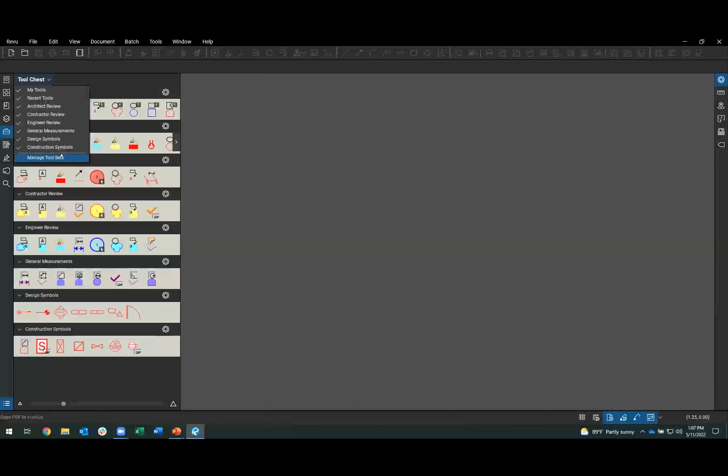Inside the Manage Tool Sets dialog box, you can click Add in the lower right corner. It will ask you for a title, and this title is what shows up and displays on the upper bar for that tool set. So what's the name of that tool set? What do you want to call it? Versus just giving it a generic name like Tool Set 1, 2, 3, give it some meaning and context to the types of tools you want stored within it.

Versus just being called Bob's tool chest, think about what's in it. Is it measuring tools? Is it common stamp-style content or symbols you might reference? Is it for wiring, plumbing, ductwork, or whatever else? Give it some actual meaning. So if I go through and do, I don't know, how about measurement tools?

So in there, I want to put tools tied to things I want to measure. I want lengths, areas, counts, whatever it might be to leverage within that tool set.

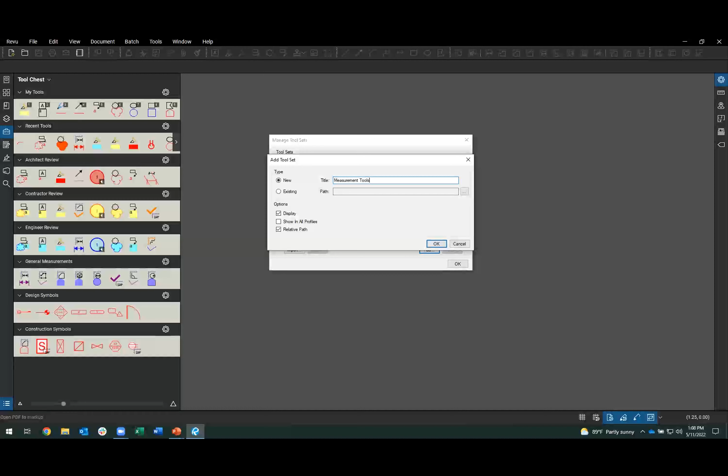It's going to prompt you for a place to save it. It should default to where the rest of your tool chest sets are located, but you don't have to store it here. This is just where it defaults to.

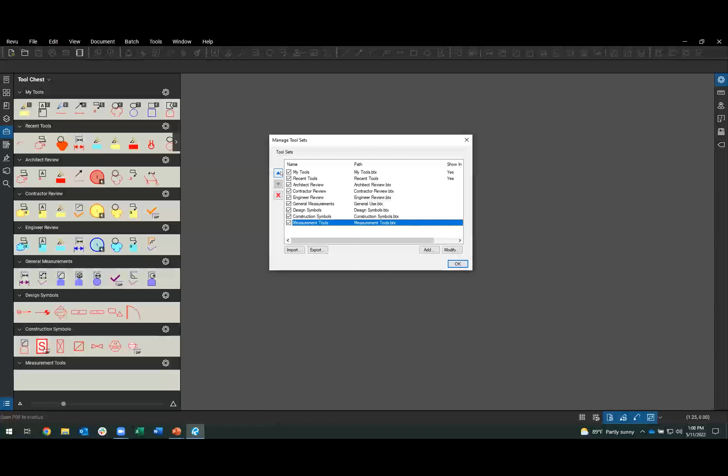Now it shows up here at the bottom. If you want to reorder that, you can simply move it up the list using the blue arrows on the left-hand side. I can move this up or down and see that tool set I just made moving up inside the panel. Also from here, if there are ones you're never going to use, you can uncheck them so they're not displayed and don't distract you from the right tools you want to leverage.

And you can select them and choose the red X here to just remove them from your profile. It won't delete that tool set from where it's been stored, like your drive. It'll delete that tool set from within the current profile you're trying to access and leverage.

That's maybe one piece to point out when it comes to sharing: the way you organize and create these tool sets can be tied into your profile. So you may want to go through and create your own department or company profile first, then flesh out the interface and the tool chest as part of that process.

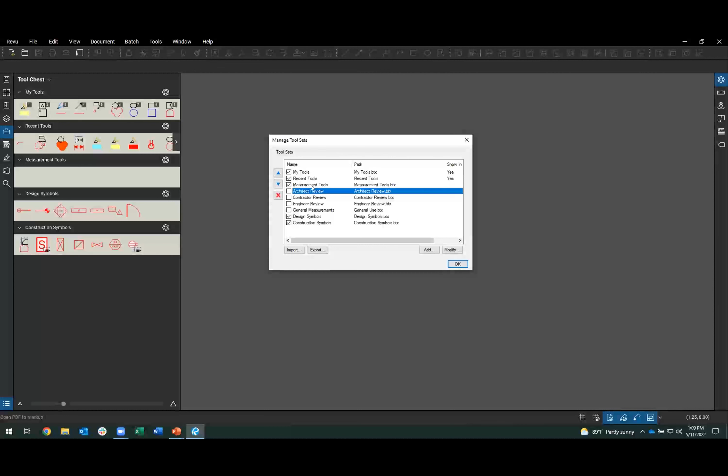So I've got my measurement tools towards the top. Now, how do you add some content into it? I'm going to grab just a file—this could be any random file you want to reference, even a blank sheet. It depends on what you're trying to create and how you want to leverage that into your tool chest set.

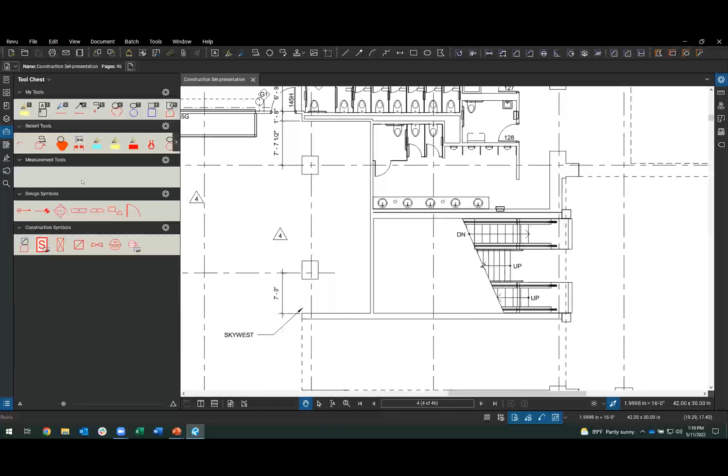In this case, I want various measurement tools—different ways to get lengths, areas, quantities, volumes, whatever I might need for the measurement process. The general premise for leveraging this is to use the tool on your PDF and then customize it to have the right properties it needs.

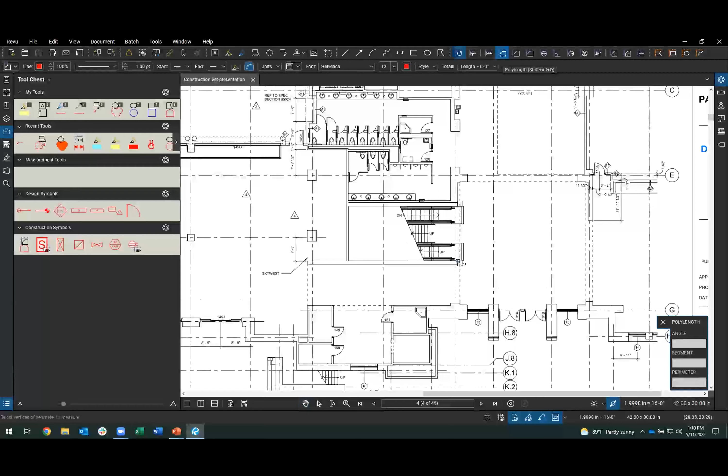So I'm going to grab my poly length measurement tool and use it somewhere on the PDF itself. That's good enough for what I want to have. Now, what about this do you want to change? Do you like the color? Great, if not, change it. Do you want the values being displayed, yes or no? Do you want to change the line type being used?

Maybe this is for a specific use case—I want to trace out the gas line being brought into some facility. It's coming from the street, going through some route, and I want that overall gas line distance for whatever it's going to be used for. So I'm going to change the line type, the style being used, to include what it's measuring. I'm measuring a gas line, so I'll have it just state the word 'gas' inside that line type.

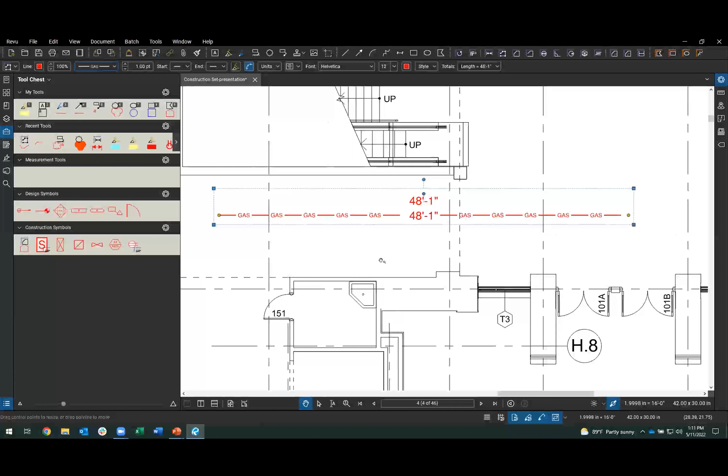Other options here too, like I mentioned, is color. Do I want that to be red, blue, green? What do you want to have that take on for the actual property set? Maybe the gas line, I'll have this be this

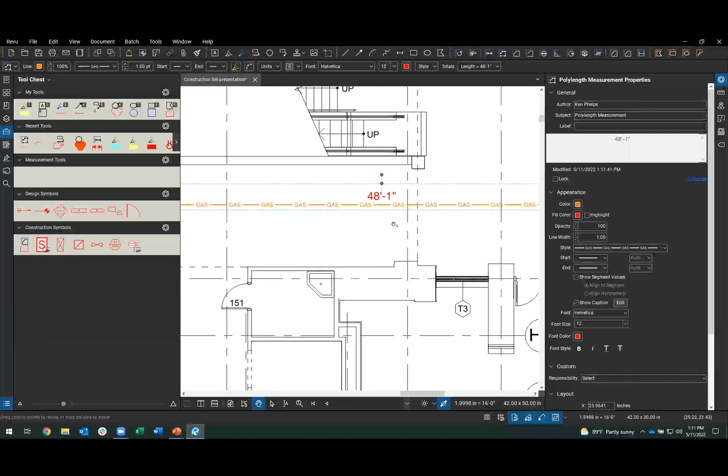orangish kind of color being used here. Just go down the list for the options that you have for that item. In this case, for a measurement tool, I'm not worried about the segment value, but it makes steps up and down, right, left, whatever. I don't need all the individual legs to be displayed on there. I may not even want to have the overall. All I want to have is just to draw out where the gas line goes. It's still going to track the value. Just because it's not displayed on the sheet doesn't mean it's not still tracked down here.

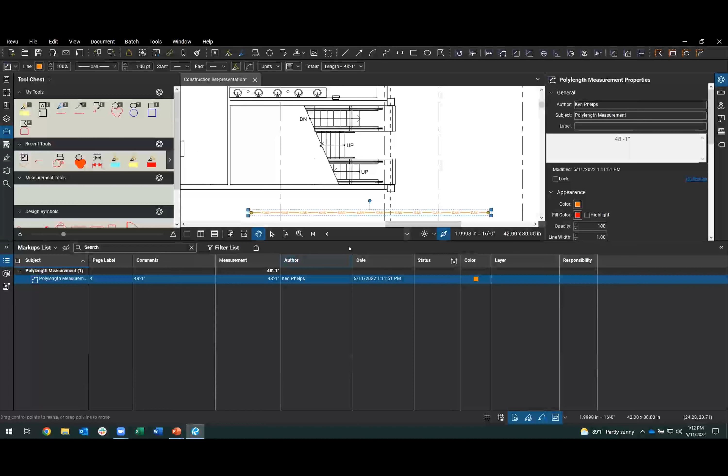So my measurement is still here. So if I use the gas line in 18 different places on the PDF, the overall total will still be here down below. And as you leverage it, it's still going to add it up.

Now, one of the big things that you make sure that you change is the subject. What is this measurement of? There's a number of ways to go through and handle and manage this, but what I typically would have you try to do initially is to be very specific with the subject. This is gas line. Is it 1 inch, 2 inch, 3/4 inch, whatever it is you're trying to measure, give it some details as to the exact properties of what that's supposed to be for.

I'm going to just call this, I can't spell, gas line. That's all I need. I got the right color, the right line type being used, all the right properties that I want to have assigned to it.

I can then add this now into my tool set. There's a few ways to go about doing that. At the bottom of your properties panel, you've got add to tool chest here. Then you just choose which tool set that new feature should be a member of. You can also simply right mouse click on top of the markup you have. You've got add to tool chest. Same idea, you choose which tool set that this new item should be a member of.

Now, if you do have your properties toolbar turned on, that's mine here towards the very top, this secondary row of icons that I have. On the beginning side of that, we've also got add to tool chest from here. There's at least 3 ways through some buttons and menus. You can also, if you have your recent tools enabled and that tool chest set is turned on, it's right here. It's the last thing that you use in that list.

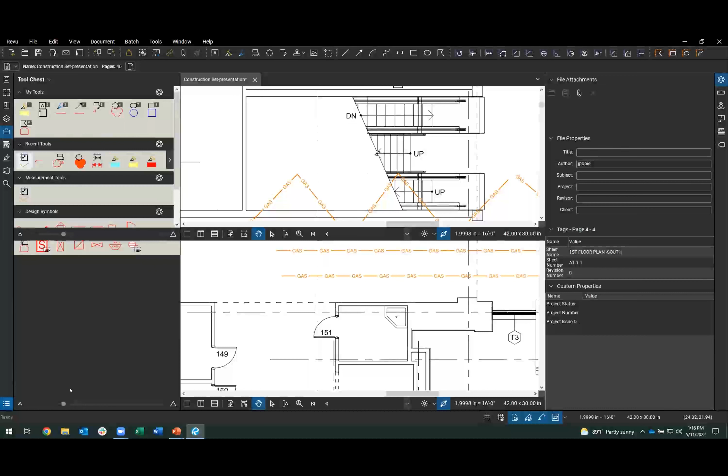So now with that tool added, I can leverage this any which way I want. It's going to add in that same line style I chose, the right colors I had assigned to it. Then again, down below, it's going to tally up all those lengths I have added into the PDF. So I have my gas line, I have an overall 178 plus feet of gas line needed for this one.

So that's just one of the ways to go through and add content to the PDF. Use the tool, and then customize that tool, add it to your tool chest set. It's all that that process really entails. It's just that same routine over and over again for the various ones that you want to make.

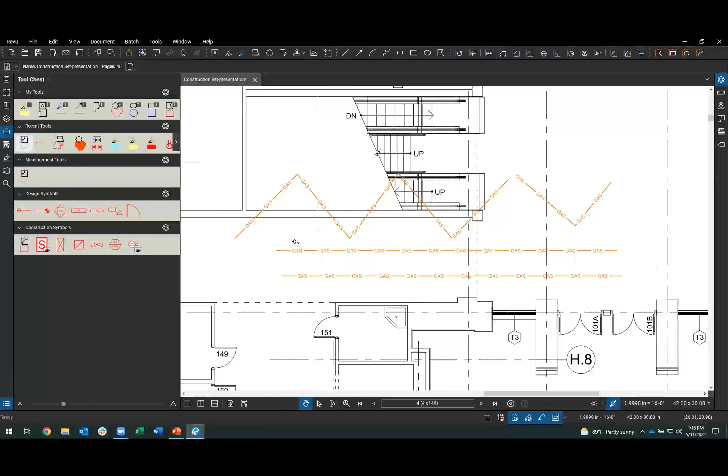So I'll go through it just one more time real quick, but maybe this one I'll use for an area. So an area measurement placed somewhere here on the PDF. And where I'm choosing for this is kind of secondary, the volume, the range, the scope of that doesn't really matter too much. I'm just building out the base tool first.

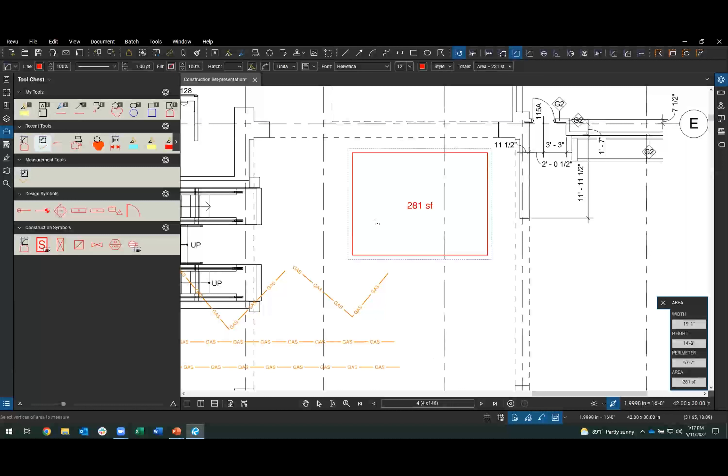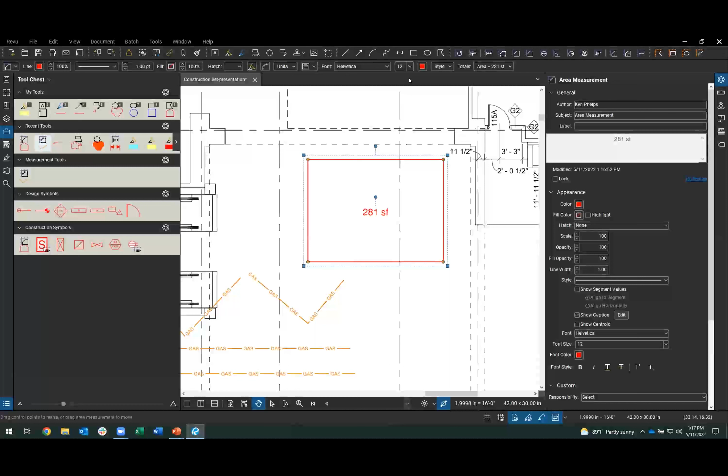Now again, properties. What type of area measurement am I trying to look for? Is it going to be here's the square footage of tile that I want to have, or here's the area of concrete being poured, something along those lines. All of that content is becoming part of that subject that you want to have. In this case, that area is going to be, I'll just say it's carpet for lack of a better example.

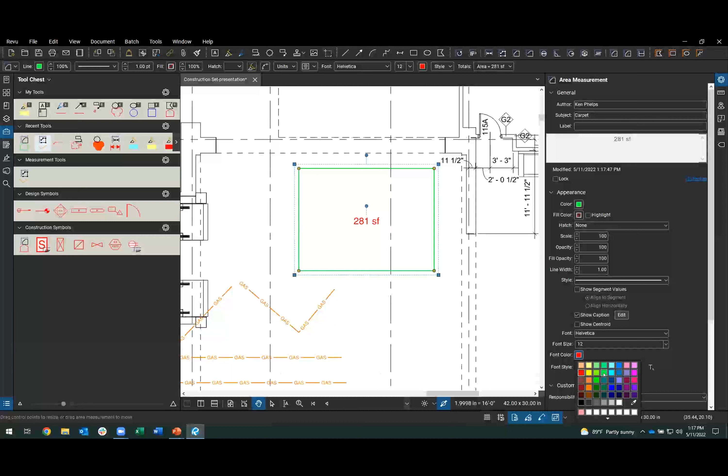Same thing, change the properties. What do you want to have for this? It's going to be green, blue, orange, pink, make it match the way you want to have this particular tool look. Maybe this one's going to be more of a cyan like green shade here. Fine, and this I will have the color turned on for, or the text for the value inside of it. You might even have a fill.

I've got a highlight type so I can see behind it. Of course, green on green, not ideal, so I'll change my fill opacity, just has a little tint of a shade to it so it kind of stands out a little bit. That's good enough for me for how I want to leverage the carpet tool for square footage.

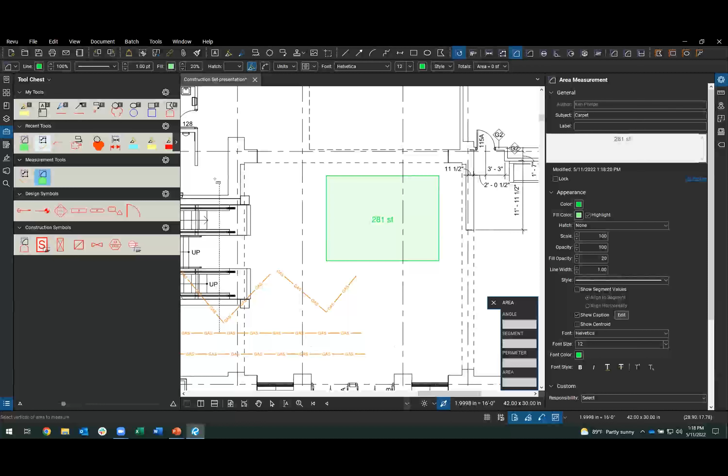So again, define all the properties to it, and then save it into your tool chest. Once it's over here, if you did it with my method I just showed, with the right click, add to tool chest, just double click the icon. So it has then the properties mode versus the drawing mode.

Now, as you flesh this out, you might have 19 versions of things using the poly length tool. It can be hard to discern one from another in this icon style display, the symbols being used here. You can change this display to what's called a detail mode. So on this little gear icon on the corner of that tool chest set, go to detail, and now it shows the subject next to the icon for it.

So if you have the condition where you have gas line, there's 5 versions of that. Now there's sizes A, B, and C being used for that. You can have a better clarity understanding which one you're selecting versus trying to guess, thinking the blue one's the 3/4 inch and the red one's the 1 inch. Just change that display.

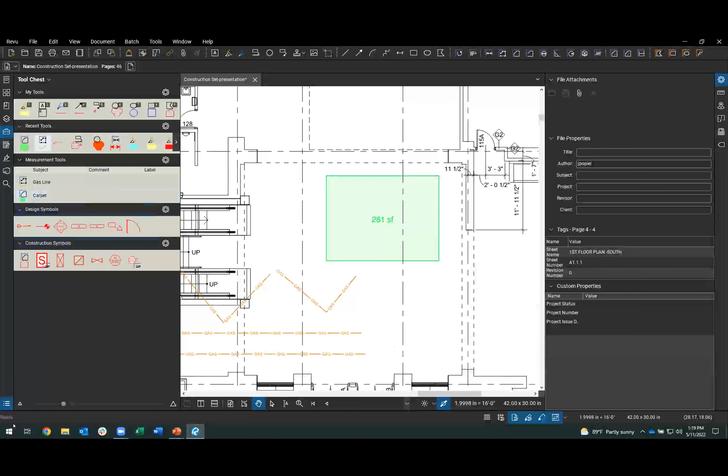Also, by giving it a subject down below here, this is what helps you go through and collect all the values and sort and filter and have the content displayed to organize the information more appropriately. So now if I add in, say, my area tool I just grabbed, areas here and area there, it groups these together down below so I can get the totaling done right for me for each one of those measurements because I'm sorting by the subject.

I know exactly how much carpet versus hardwood flooring versus tiling. If I have those tools set up for area measurements, it'll collect those and group those based on subject, based on what you're sorting off of.

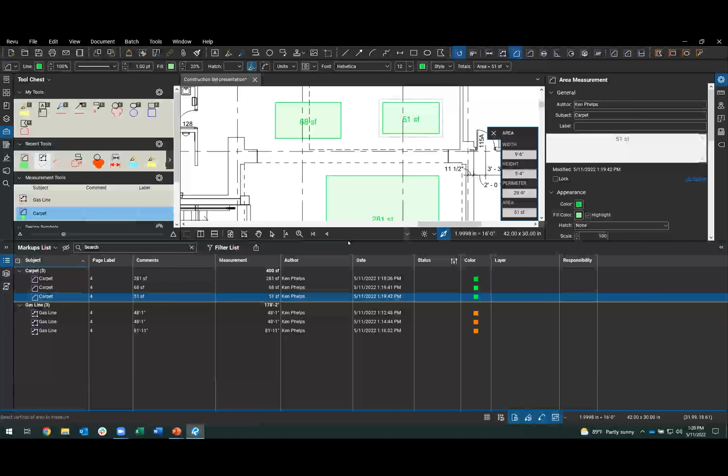Another way to go through and create content and add information into your tool chest: it might be for a symbol, like my door here, or the little valve down here. Just draw it up.

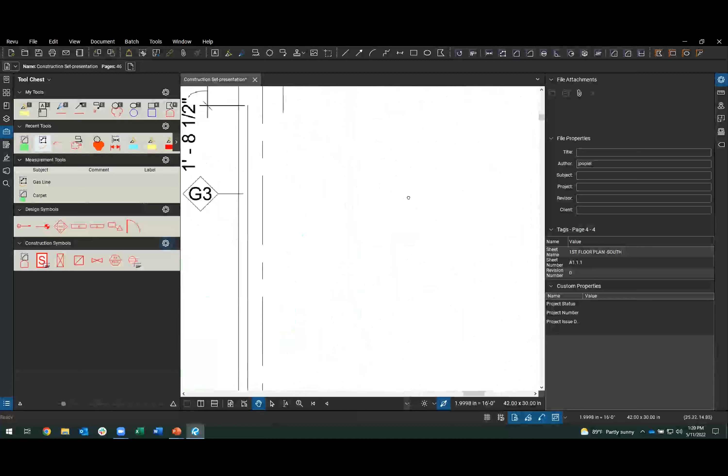If I want to simply draw in some new shape to be used here, it can be leveraged for whatever makes the most sense. I go and just grab a rectangle, whatever size it has to be, and draw a line coming across here. So in my example, I have 3 different objects that make up this symbol.

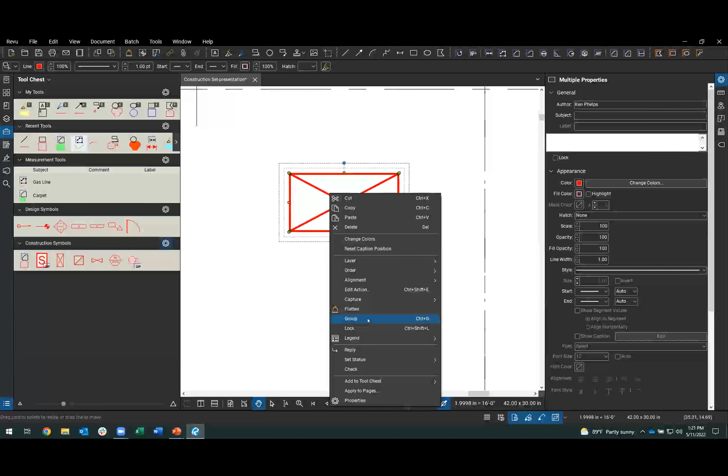If I were to take this symbol as it is and add it into my tool chest, I'd have 3 separate items, one for each line and one for the rectangle. If I want just 1 symbol, I need to make this 1 symbol first by simply grouping that together. Now, with it grouped, it's 1 item versus 3 separate items that make it up.

Same approach - you still want to go through and adjust your properties, change the subject. When you group, make sure you change the subject after you've grouped it. Otherwise, you'll have the subject be the name of the tool that made it - in this case, the grouping function, which made this kind of envelope-looking symbol that's here. Make sure you change your subject.

I've been bitten before where I've changed the subject on the rectangle to call out some kind of valve or wall stud or whatever it's going to be leveraged for. Then I group it and I lose that, because the grouping name doesn't take on the properties of what's beneath it. So make sure you change the group.

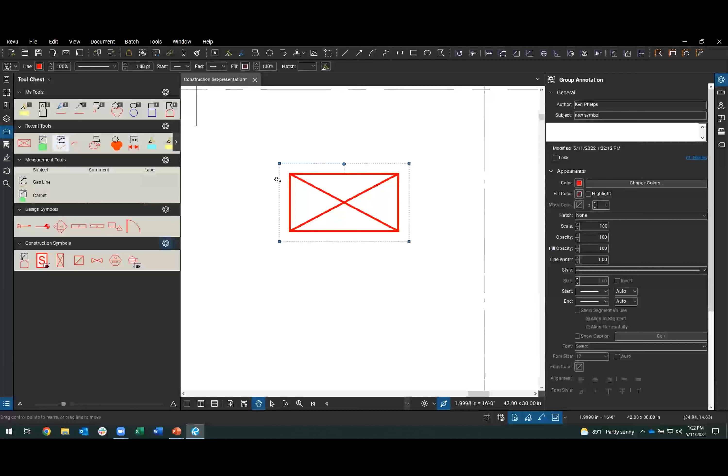Call this a really fancy name, 'new symbol,' whatever makes the most sense for what you want to call it. Same thing - however you want to add this into the tool chest, you can take it and drag and drop it right here from the recent tools, or like I'd shown before, add it from your tool chest this way.

Now that symbol can be added into any PDF I want to leverage in the future.

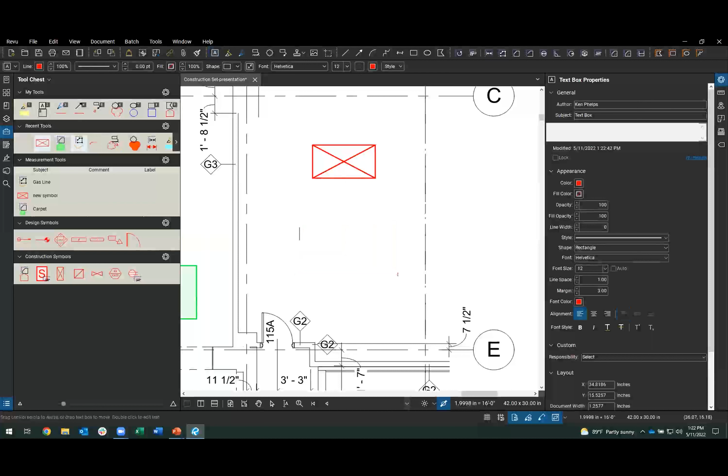Now it can be just basic text - I want to have a basic text note. Maybe you've typed out some long paragraph on why a certain inspection failed, or some code requirement for the conditions to be successful in building this project. Whatever that notation has to be, you can type it once and save that into your tool chest.

So next time that same condition comes up where you're reviewing a set of plans and go, 'well, that failed because of this again,' you can take that note and simply place it where it belongs on the PDF. I don't have to retype this ever again.

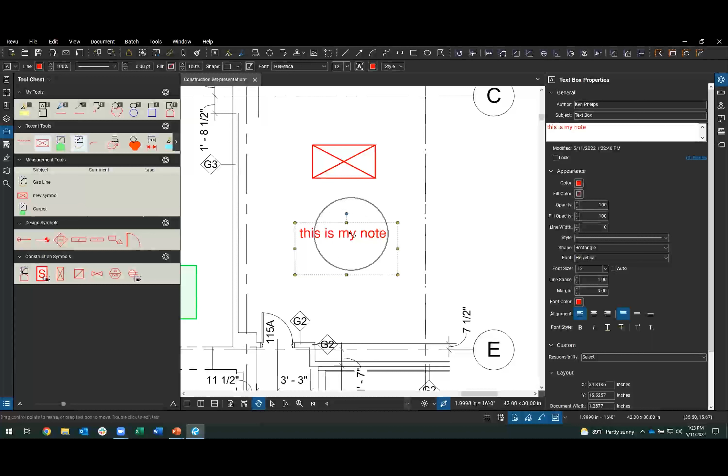And same as before, make sure you have all the right properties - the right content, color, and whatnot, the way you want the note to look. Just define all that up front, then save the tool into your tool chest. This is one of my favorite areas of the software, this tool chest. There's so many ways to leverage this to make your process so much more efficient. It's a little crazy.

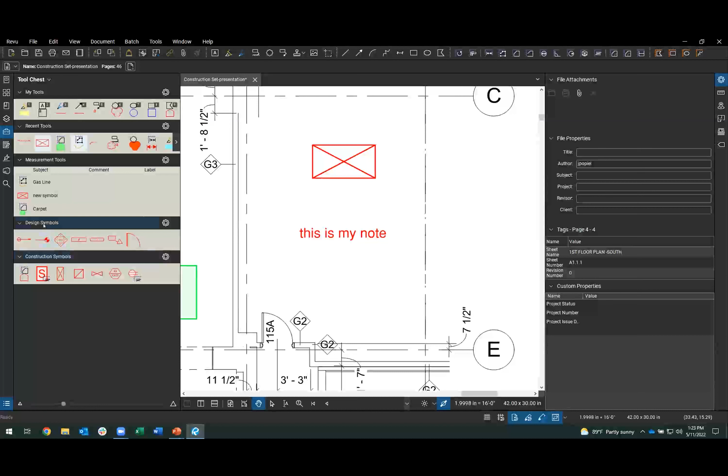Some other pieces that can come into play, ways you can elevate your tool chest a bit: if you have certain size symbols - say, for example, my design symbol down below here, a door - this door was meant to be placed on a specific scale size plan. This one symbol isn't going to work on every scale plan PDF; it's for a given size. I'm not sure what size this was meant to be used for, but...

What you can do is, for all the symbols in a particular tool chest set, let's say they all came off an 1/8 inch to a foot plan - you can set the scale for all the tools in that PDF to reference that 1/8 inch to a foot. So if it's ever used on something other than an 1/8 inch to a foot plan, it'll scale up and down for you automatically. You're not forced to have 9 flavors of some block just to have the right corresponding size to match the scale plan you're working on.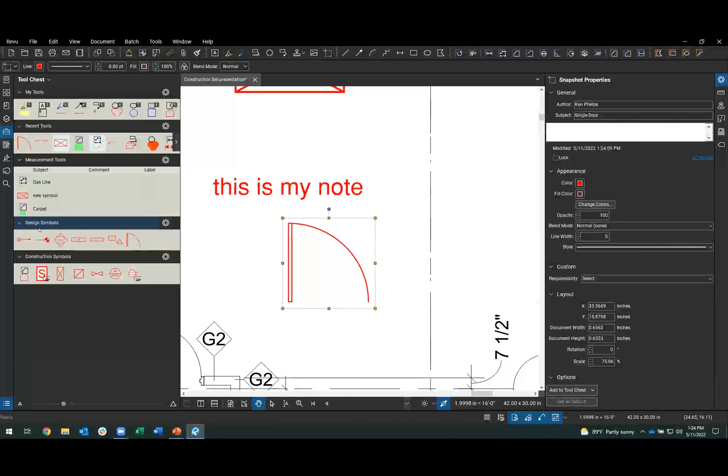Let me show you what I mean. I'm going to assume the base scale here is 1/8 inch to a foot for the symbols being used. It may not be, but it's good enough for the example being shown. I'm going to have 2 different scales on the PDF to show how it scales automatically. So to set that baseline scale, go to the same gear icon here on the end.

There's a set scale option, about 1/3 of the way down. The idea behind this is that you're setting the base scale for all of the symbols on that tool set. So you want to make sure that all the symbols you're adding to that tool set are of the same original scale.

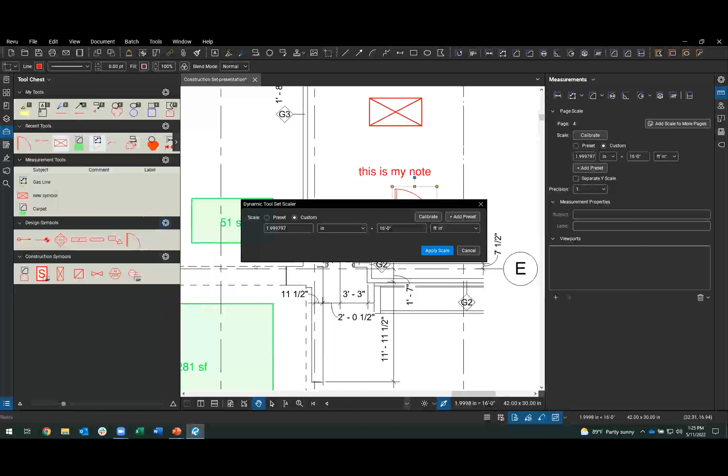This is one of the pieces that you shouldn't ever have to need to change once it's been applied. You set your scale to whatever it has to be. I'm just going to go to the presets and say, yep, it's going to be 1/8 inch to a foot. That's my baseline scale for this.

So with that enabled, there's a little triangle here with a blue highlight behind it. That means I have a scale set and it's currently enabled. You can simply disable that by clicking the icon. Now it no longer has the blue highlight, and the scale is no longer being looked for with those tools.

Just the way it was drawn, the way it was saved in your tool set, is the way it's going to be inserted into the PDF. I'm going to turn mine on.

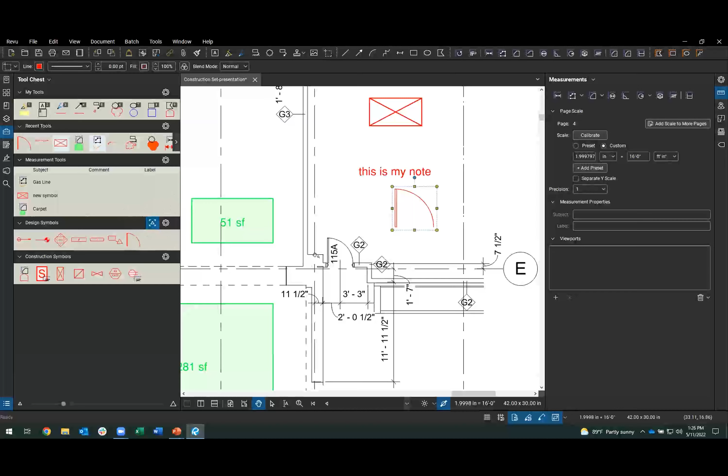I'm going to show you something here where I want to have a different scale just someplace else in the PDF. I'll just choose the region right about here. So this area, I'm going to make that a different scale.

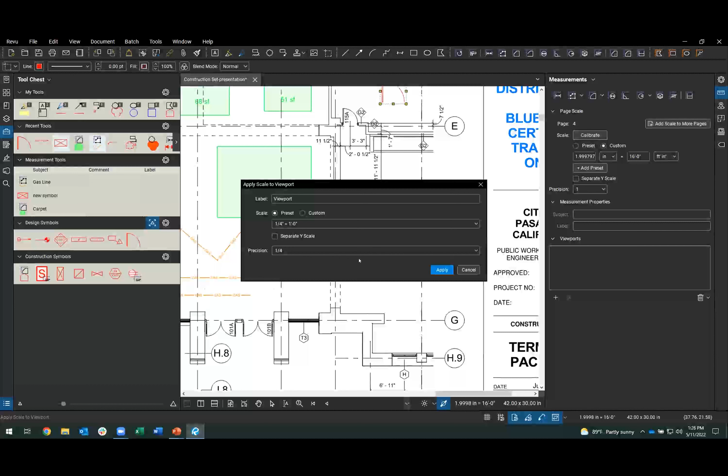So the whole intent behind the viewports is a way to have two different scales of content on the same sheet. You have some large full-size style view, plan view, section, highlight, whatnot, at 1/8 inch to a foot. Then you have a section or detail that should be a different size - quarter, half, 1 to 1.5, whatnot. I'm going to choose the quarter.

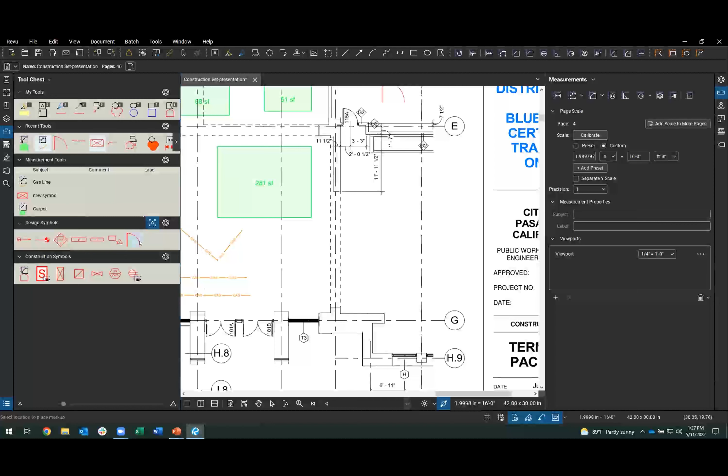So everything inside of my blue shaded area here is a different scale than the rest of my page. So when I insert this symbol, you see here it's this size. Now as I move into that space, it doubles it because the scale is a quarter versus the baseline 1/8 that the tool is assigned to.

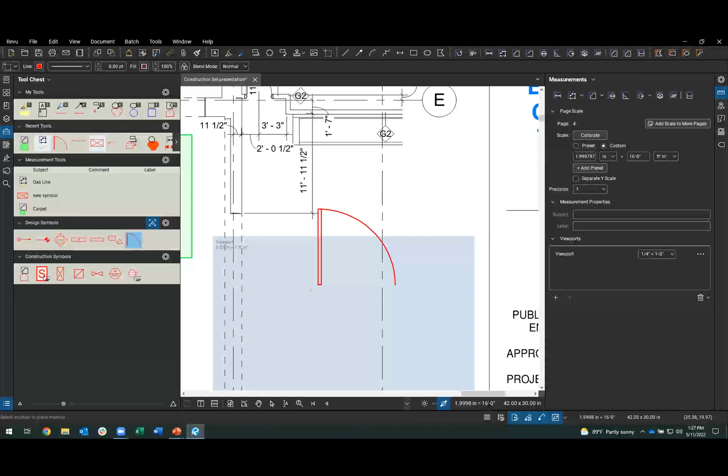So this will take care of trying to adjust the size of the tools simply based on the scale you have in the sheet. Now this will work if the entire page is set to a different scale, or just a region like what I have here, but it's going to adjust the size of those symbols to match the scale accordingly.

This alone can save you a lot of frustration and headache - saying, well, I brought the tool in, but it's the wrong size. You can grab corners and stretch it and try to modify it after the fact, but those are never accurate.

So just set the scale. Ideally what you do for this then is that you'd never have to change this. You have a scale set. It's set to an 1/8. That's the baseline size for all the tools inside of that tool set - 1/8.

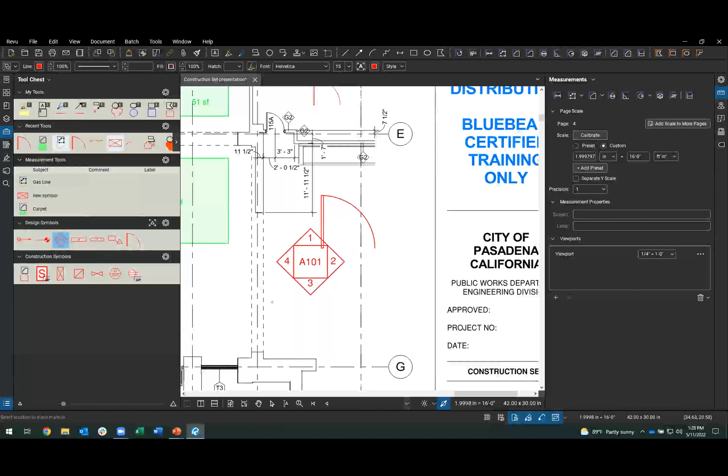If you don't want that, if somehow that's messing up what you want to do, just simply click the icon here to turn that scaling feature off. Then however it was set up and created is the way it comes in - that's how big it's going to be once inserted. If I turn it back on again, using the same tool, now it's this much larger, and now it's looking for the scale.

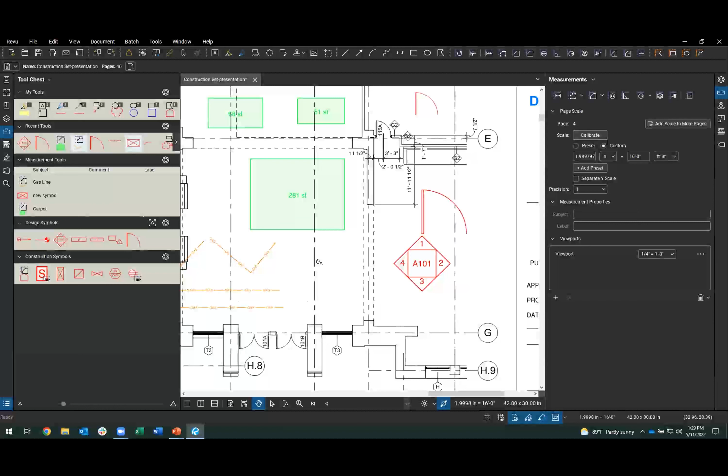A different way to go about adding content into your tool sets is to just steal it right off the PDF. I don't want to go through and reinvent the wheel to redraw some content. Say, for example, I need the sink, whatever - I need to have that content as an item inside of my tool chest. I can just capture that data, modify it to have whatever properties it needs, and then save it into my tool chest.

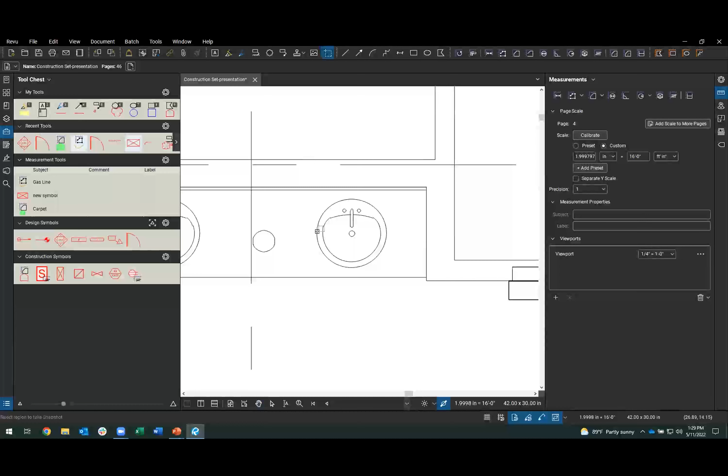I'm going to grab my Snapshot tool - it's just the letter G, the default shortcut for that. This is what I want, this data right about here. Close enough - that's now copied to my Windows clipboard. I'm just going to paste that back in here. I need this in here when I put it in my design symbols.

Like everything else, go through and adjust the properties. Looking at subject, it's the name of the tool that was used to make it - in my case, it's now Snapshot. I want to call this Sink.

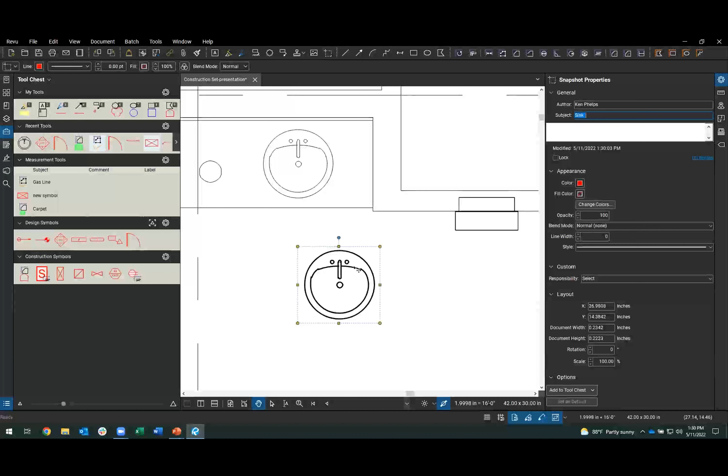Now, in this case, to show more of a markup focus that doesn't look like it came from the architect, but rather a true markup from whomever is reviewing it, I want to change the color of this data. It has this bolder black line being used. That needs to be a red line, with red content.

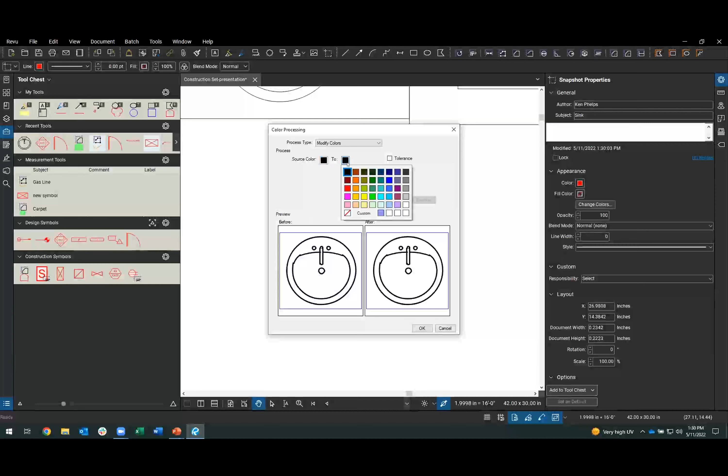So in properties, you can choose change colors, or you can right mouse click since it's on the right click menu as well. Change colors: this routine is just a matter of finding my source color and changing it to my destination color. So find all of my black lines, change those all to red lines, and OK.

Now I have the right subject, call it a sink, with the right color assigned to it that I want. I can now add it into my tool chest. I'll put it in my design symbols here as well, so now I have that sink hanging out right here. I can then reuse that on other files downstream.

This method of basically just copying it right off the PDF can be a great way to populate your entire block library, say for example from AutoCAD. I've seen folks go through and make a new AutoCAD drawing file and insert all the various blocks into it, just print that to PDF, then steal the content right off of there to build out your tool chest sets with that same information.

So if you're missing some details—a fire hydrant, a street sign, a sink, a window, whatever—you can just grab it from your existing libraries in your tool chest set and drag it into the PDF you're trying to review.

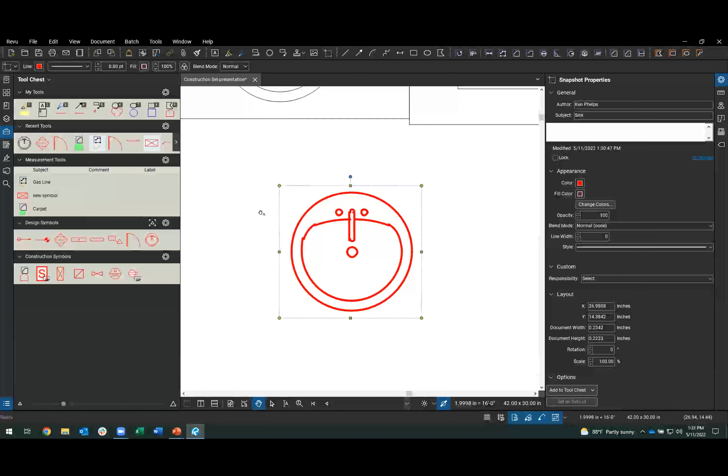Now, other items you have access to do, ways to elevate the process around your tool set: you can have whatever symbol you need also be a count symbol.

This will be useful for when you're trying to go through it and say, here's items X, Y, or Z, how many do I have in my plan? Counting up and doing your takeoffs of the PDF itself, you can make whatever symbol you need.

You can draw it with multiple pieces to it, draw it up like I did that box before in my new symbol here. This could be a count symbol instead. So it can be as detailed or as simplistic, as generic as you want to make it—it can still be a count item.

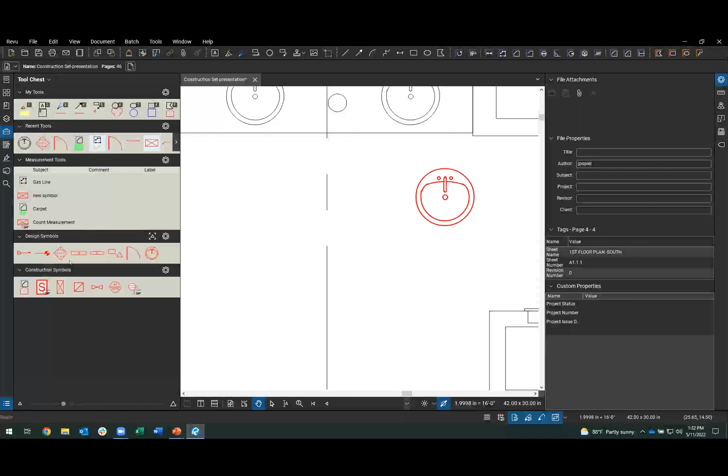It's hard to really tell the difference between these two, but this one has this little tick mark option down below. It should match my actual count tool symbol up here in my upper right. This is now a count measurement feature. I can leverage that and just start clicking away, saying here's a bunch of counts.

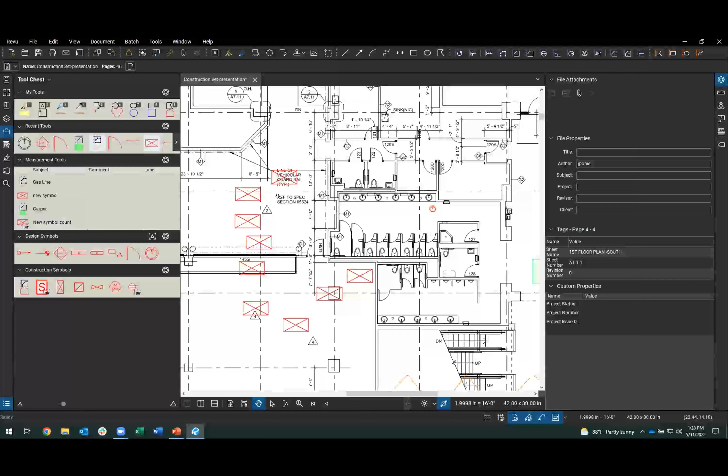Now, the one downside for this routine is that since I copied this new symbol to a count symbol, it made a new generic name to it—just 'count measurement.' You can double click this and call it new symbol count, whatever name you want to assign, so it's appropriately tagged for what you're trying to count. So that's just one additional update you have to do to have the right naming to it. But that can be used for anything—anything you want to populate into this can be made into a count symbol.

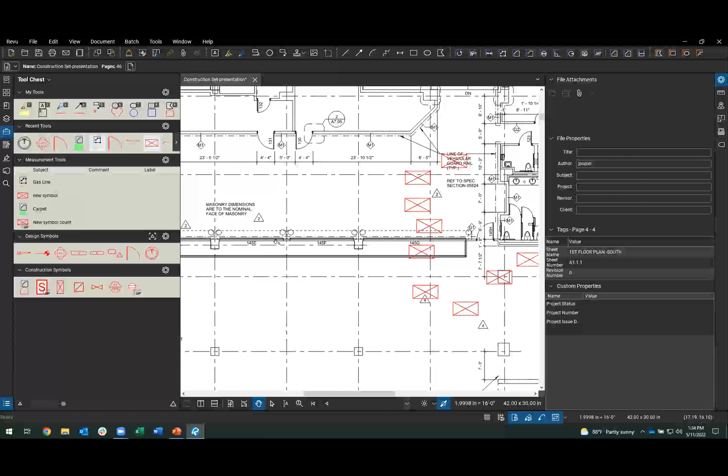Another option you have too is that you can create some of these tools to be what's called a sequence, meaning as you insert the first one, it may have a number 1 on it. You go to the second one, it goes to 2, 3, 4, 5 automatically. Let me just show you what I mean.

So if we do a quick text box here, I'll call this 1—why not. I'll do a rectangle around it, good enough, group these together, and add this into my tool chest. So this one, I didn't change my name—let me change the name here quick. Call this sequence.

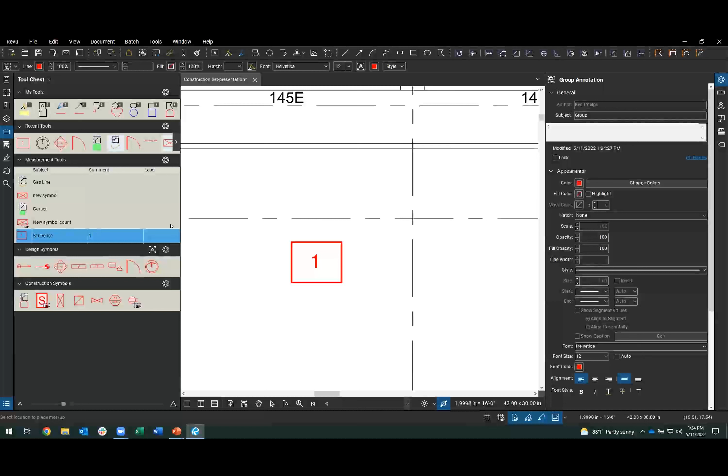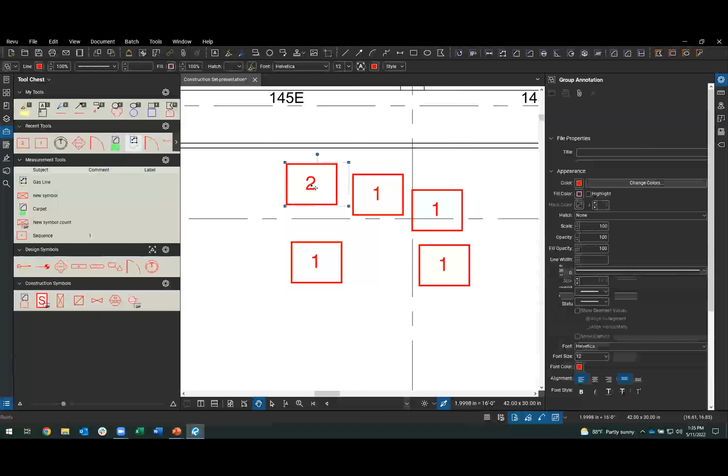Now it currently is not a sequence, it's just a 1 with a box on it, so I can just drop this in—that's all it's for. Even as it sits, I can still come into here and double click the text where it's got 1 and change that to a new number. So if you group up multiple items, if one of those items is a text string, it's still modifiable after the fact, and it's still going to be grouped together. So it's still one symbol here—I don't have it broken up into 2 pieces.

What I want to have happen is that each time I place one of these in, it goes from the current count to the next one in the sequence. So 2, 3, 4, 5, and so forth. So I can create a sequence.

So if I define that, what styling do you want? Is it 1, 2, 3? Is it ABC? You choose what makes the most sense for the numbering scheme. Is there a certain prefix or suffix? I've seen people leverage this for RFI tags - they have RFI as the prefix, then the latter half is RFI 1, 2, 3. As you drop those pieces in, it'll sequence and index the number up automatically.

Where do you start? Is it going to go 1, 2, 3? Is it 1, 5, 10, 15? What is the increment?

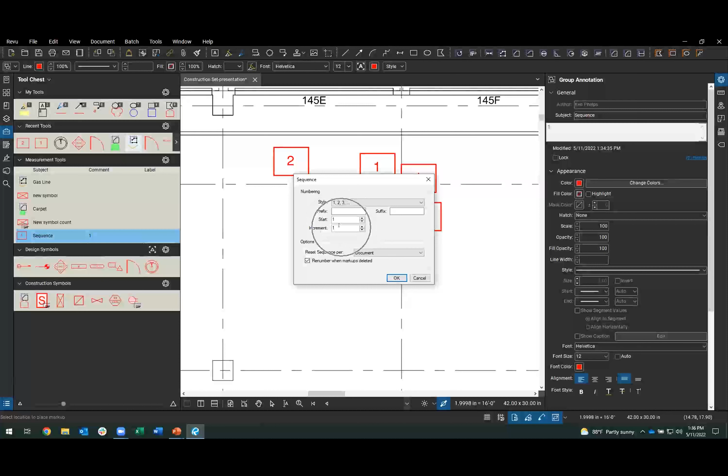A big one here is the couple options below. One being this renumbering - so if you had 1, 2, 3, 4, 5 dropped onto your PDF, but then you pull out number 2, does the 3, 4, 5 shift down to be 1, 2, 3, 4? Or does it just leave 2 out, going 1, 3, 4, 5? So if you're tagging your markup saying here's markup 1 through 5 to reference later, you want markup number 5 to always be markup number 5.

So you may or may not want this to remove the gap that's missing. That's up to you. Then the last thing is to reset either by page or just for the document. If I use this same tool on page 5, page 6, page 7, does it maintain where I'm at in the sequence? If I'm on number 6 on this page and jump to number 7 on the next page, is that 1 or is that 7? You pick and choose how you want to manage the numbering scheme.

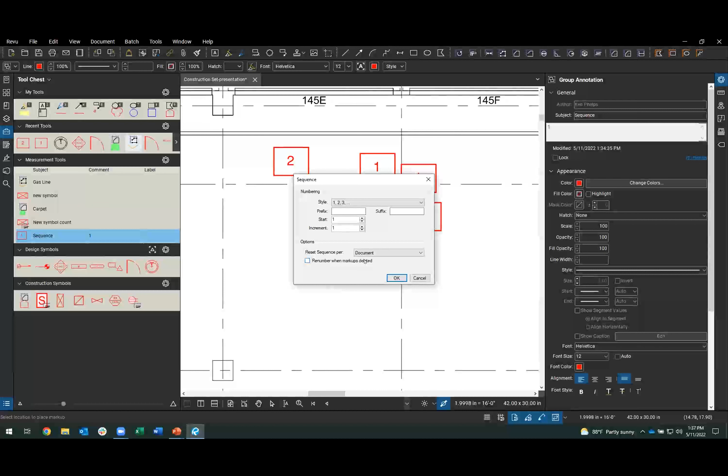So once I've made that tool into a sequence, it may be hard to see on screen - there's a little plus or play symbol down here. As I use it, it goes from 1 to 2 to 3 to 4 across the way.

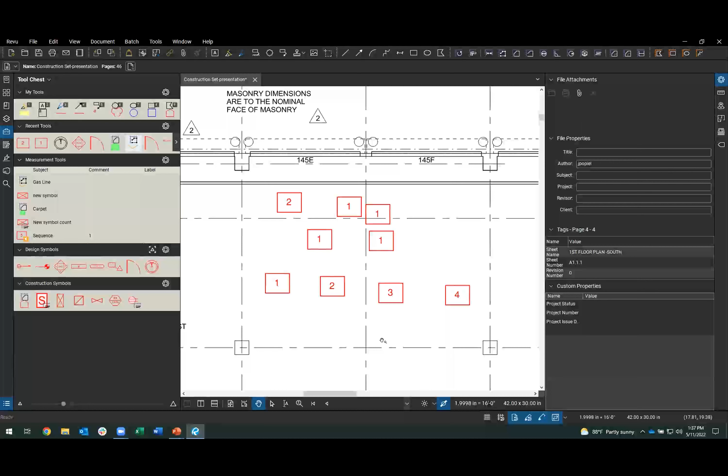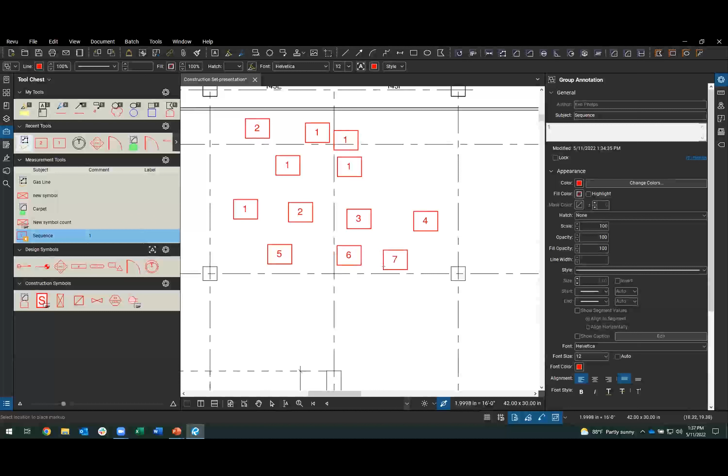Now I can leave the tool - I just escape out of it. I can go do something else, grab my gas line, and drop that back on here again. If I pick the same tool up again, notice this little play button has that yellowish orangish tone highlight to it. If I pick it again, it goes right to 5, 6, 7 - it picked up where I left off automatically.

Now to reset it, one way is to click the little icon in the corner of the symbol. That shading goes away, that yellowish orange tone, and it goes to a normal black and white symbol - it's starting over again. If I click that, it's back at 1, 2, 3 as you start.

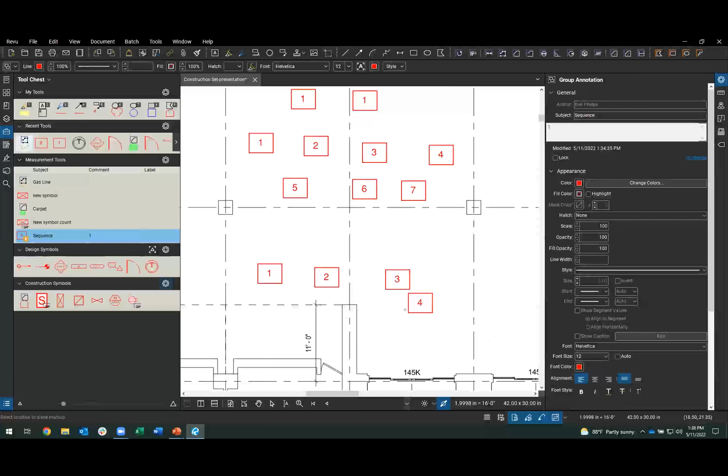Now for something like this, maybe I come back in tomorrow and want to pick up where I left off with my sequencing. Any one of these you can select, right click, and choose to resume the sequence, and it'll pick up wherever it left off last time. So if I left off at 7, I'm at 8, 9, 10.

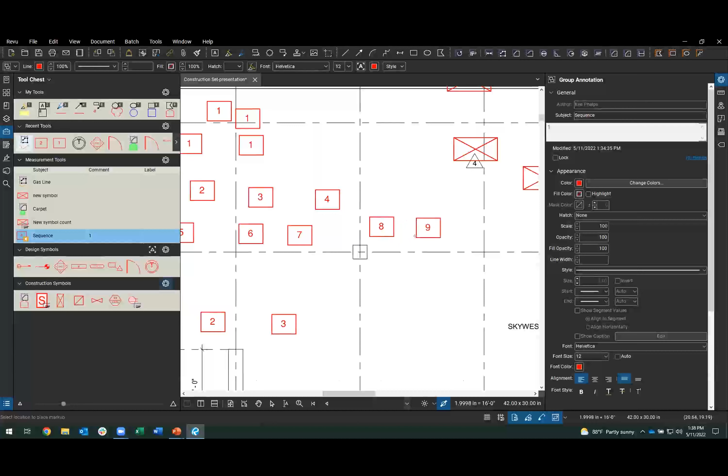So with the scaling and the sequencing, those are a couple ways to elevate your use of the tool chest. Now, one of the last things I want to go through - I could probably talk about this for the next hour and a half - is sharing this content with the rest of the team.

As you build out your tool chest sets, I recommend going to this little gear icon and clicking save every so often as you go. Because that first time I made this measurement tools tool set, that's making the initial container where the tools are held. Nothing's been saved into that file until you choose save here. So if my PC dies or the software crashes, I would lose all the effort I put into this - it's not saved unless you choose save.

You can also go to your Revu menu, go to profiles, and just save the profile - does the same thing. That might be easier when making a lot of custom tool sets, since you might have a dozen different tool sets of various tools. Just save the profile, saves everything, versus going into one gear, clicking save, then the next gear, clicking save, down the list. If you have several of those, that's tedious. Just go to your profile option, hit save off that menu, and you'll save all your effort.

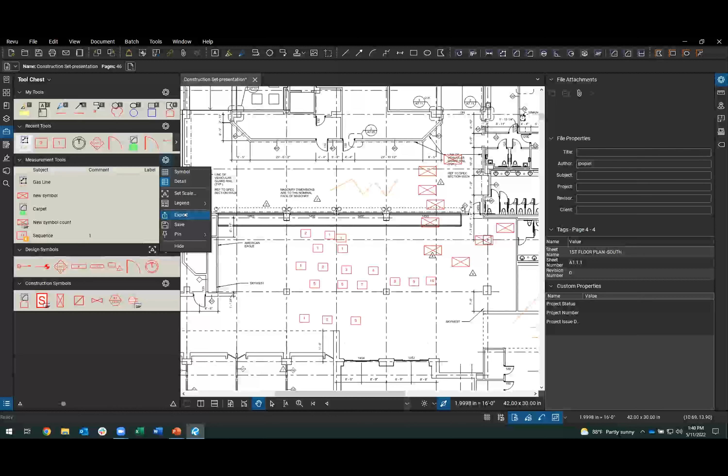You can also go into your managed tool sets, select the tool set you want to pull out of here, choose the name of it, and you have export here as well. So another means to go through is to put it in some centralized location that the rest of the team can access.

And again, you can go through and share the entire profile if you wanted to as well. But it doesn't have to go by one. So if you've made multiple tool sets here, versus sharing each file individually, maybe you want to share the whole profile.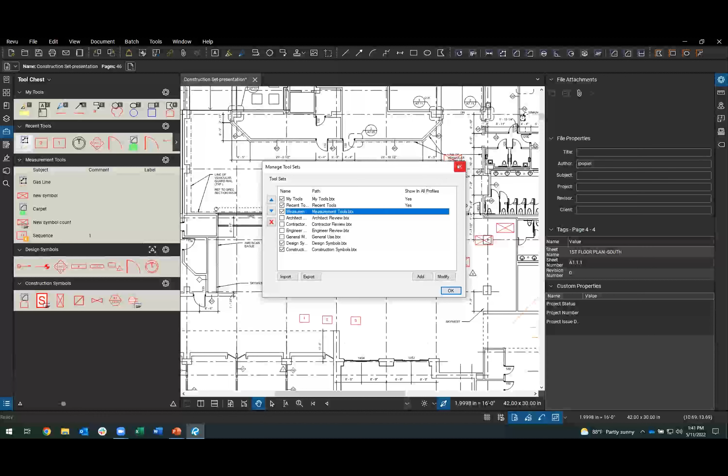Be a bit more cautious with sharing the entire profile, because you're getting everything with how your toolbars are laid out, how your panels are described, profiles, how you have the interface as well. It's not just a tool chest. This also ties into the whole markups list. That will be a whole separate conversation for a future webinar probably, but custom columns and whatnot tie into your profile as well.

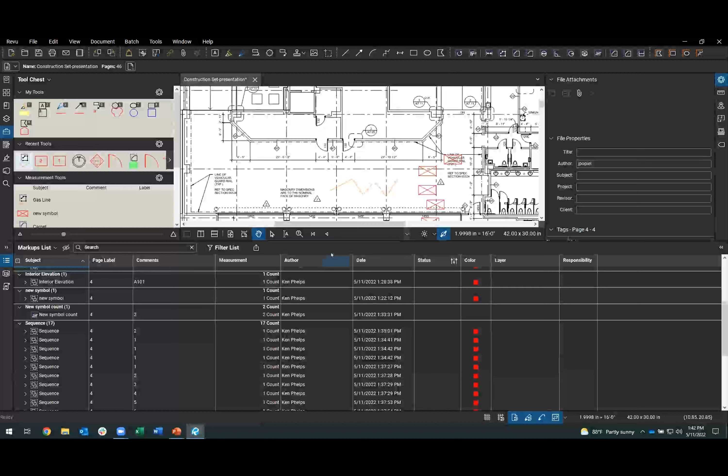So a couple ways to go about sharing that content with the rest of the team.